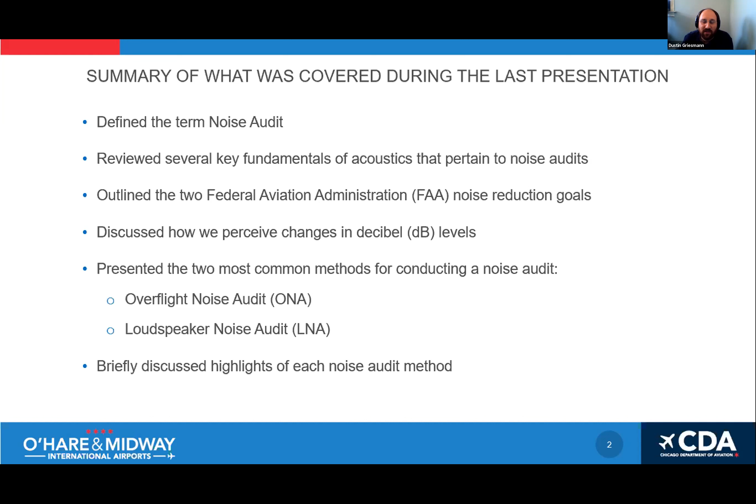So good morning, everyone. Thank you for inviting me back to present some more information on the RSIP noise audit process. Today's presentation is going to focus on noise audit regulation and guidance. But before I begin, I'd like to briefly recap what we discussed last time. So in my previous presentation, I defined the term noise audit, reviewed some of the key fundamentals of acoustics. We outlined the 2 FAA noise reduction goals, discussed how we perceive changes in decibel levels, and then presented some information on the 2 most common noise audit procedures, being the overflight noise audit and the loudspeaker noise audit, and then provided some highlights on each one of those.

Today, I'd like to build on that by providing you with some additional information on the noise audit regulations and guidance. I will begin by listing the applicable regulation and guidance documents, and then I'll show you how these documents have led to the noise audit procedures that we use on RSIP. So I've divided the regulation and guidance documents that we will discuss today into 3 categories. And I'd like to start with the first one, which would be direct FAA regulations. So first we have the Airport Improvement Program Handbook, Order 5100.38D, Change 1. And this is the primary instructional document that governs the AIP-funded residential sound insulation programs. Now, Change 1 was released in February of 2019, and most of the applicable information relating to sound insulation can be found in Appendix R.

Inside there's one reference to noise audits, which lays out the requirement for programs to use the 1992 guidelines when establishing existing interior noise levels. So that brings us to the second item there, the advisory circular. That is the 1992 guidelines. So it's Advisory Circular 150/5000-9A, and that is the active guidance document for noise audits. I would say, however, that the majority of the guidance in there pertains more to overflight noise audits. Underneath there, I put another bullet for a new draft Advisory Circular 9B that was released for public comment in 2019. So this draft AC includes considerably more information related to the noise audit procedures, yet until it's officially released, the 92 guidelines are still referenced in the AIP handbook.

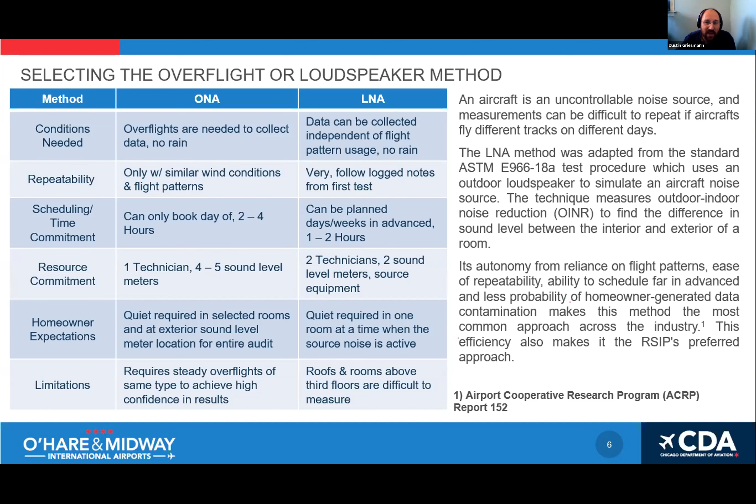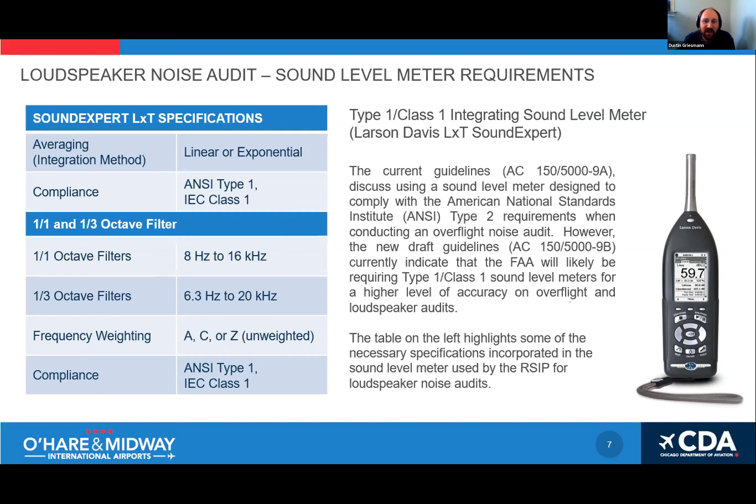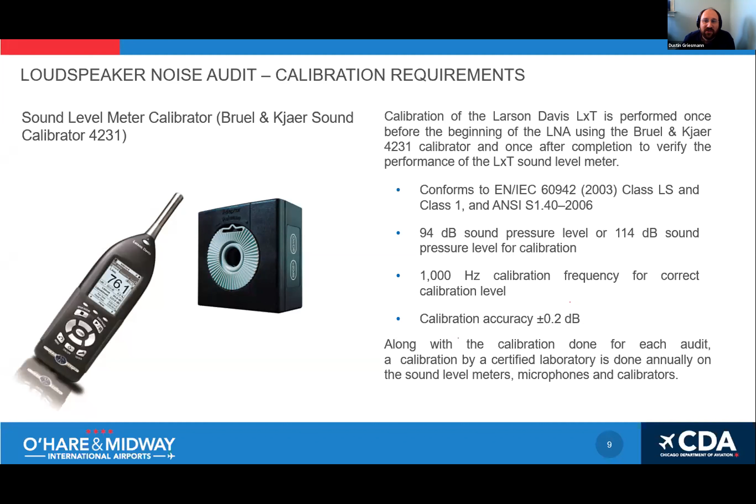So all sound level meters and microphone assemblies are calibrated using a field calibrator just before and after every noise audit. And this provides us with a known level of certainty in our results. But beyond that field calibration, we also send all sound level meters, microphones, and field calibrators for annual calibration through a certified calibration laboratory. And this again ensures that our equipment is performing to all the manufacturer recommended standards.

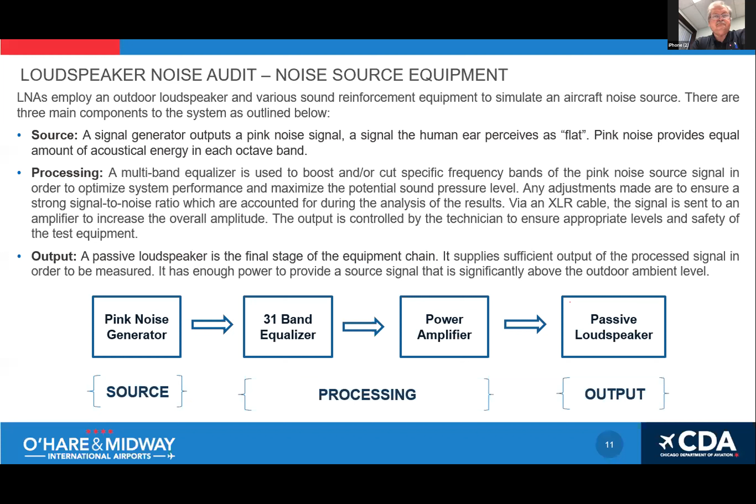Next, we have the processing section, which normally consists of an equalizer and a power amplifier. And this equalizer is used to focus our available amplifier power to the frequency bands of interest and increase the signal to noise ratio of the system. And finally, the amplified signal is then sent through a loudspeaker and then transmitted to the exterior facade being evaluated.

And it should be noted that these desired locations and angle of incidence may not always be possible. Sometimes we have physical obstructions on the property that might hinder that. So this distance and angle of incidence can be adjusted as long as some other requirements are met.

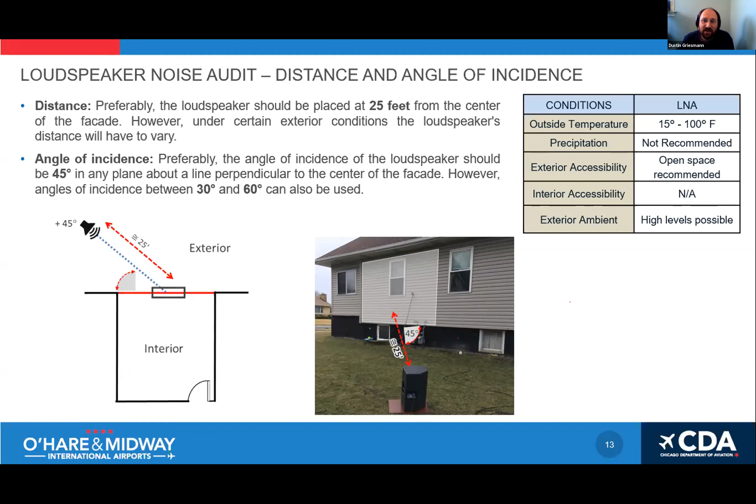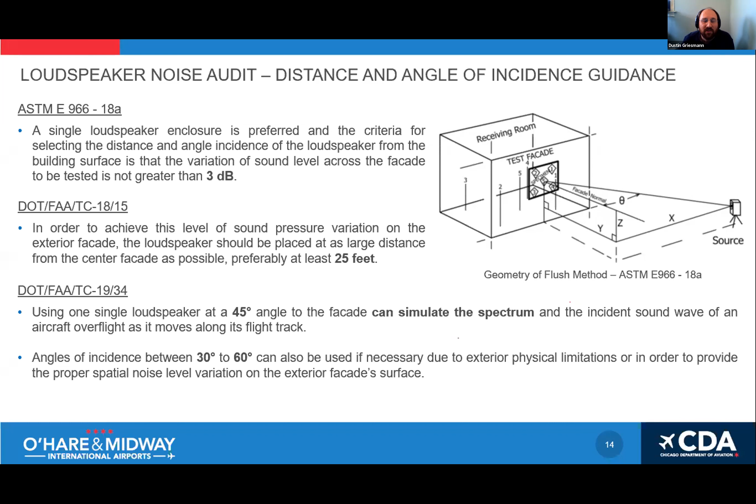Excuse me. So the next factor deals with the mounting method of the loudspeaker. For first floor rooms, as well as second floor rooms that do not reach higher than 24 feet, the loudspeaker is to be mounted on the ground. And when the measurements of a second floor room reach higher than 24 feet, the loudspeaker should be elevated on a speaker stand to a height of 6 feet.

Now this would also be necessary if we were conducting an audit on a multifamily building where that floor under evaluation is higher than 24 feet. Also noted here is the potential need to tilt the face of the loudspeaker back slightly when trying to aim the test signal at a specific facade height.

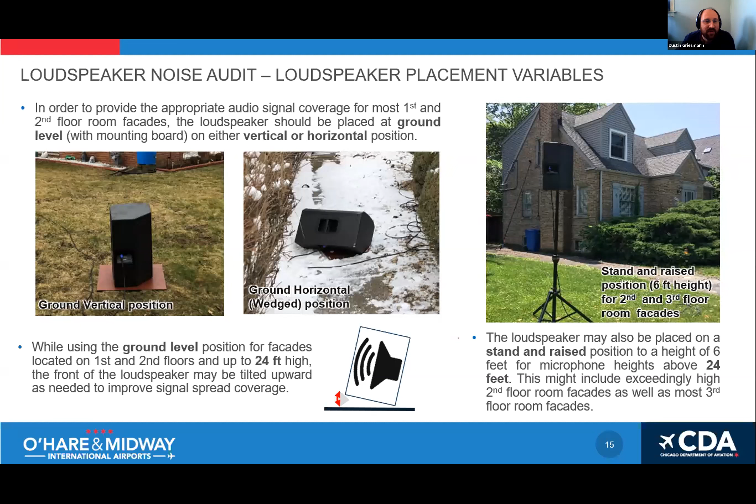So why does the RSP use the ground mounted loudspeaker for some measurements and a 6-foot mounted loudspeaker for others? The answer really lies with the problem known as ground reflection interference and the negative impact that has on the accuracy of our measurements. So when a loudspeaker is elevated and a microphone is elevated to measure at a specific height on a facade, you get both direct sound that travels from the loudspeaker to the microphone, as well as reflected sound that travels from the loudspeaker to the ground and then from the ground to the microphone.

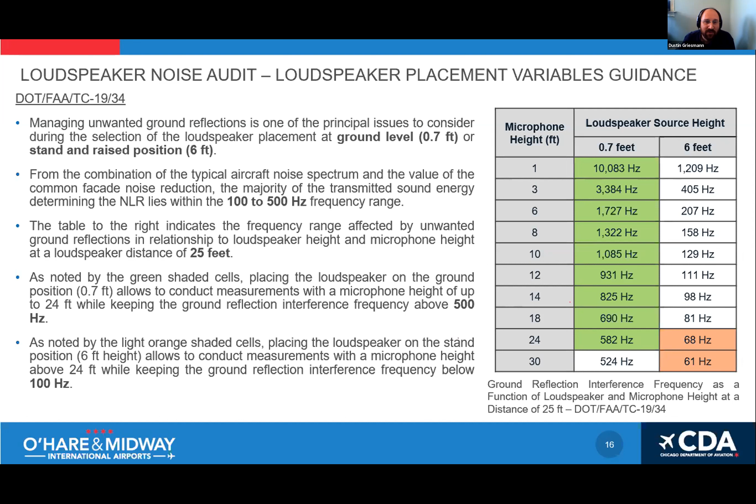Taking this further, the number of facades the room has will also impact the noise audit procedure that we use. We see here that for rooms with only one exterior facade, the 1W procedure can be used. And the loudspeaker can really be aimed from either the plus 45 or the minus 45 degree location.

For rooms with two exterior facades, the RCP would need to use either the 2W1 or the 2W2 procedure, and this is dependent on the presence of any nearby reflecting surfaces that might prevent an equal audio signal spread across both facades with a single loudspeaker. So if we see that there are nearby reflecting surfaces or we can't get that equal audio signal spread, then the 2W2 procedure would be necessary.

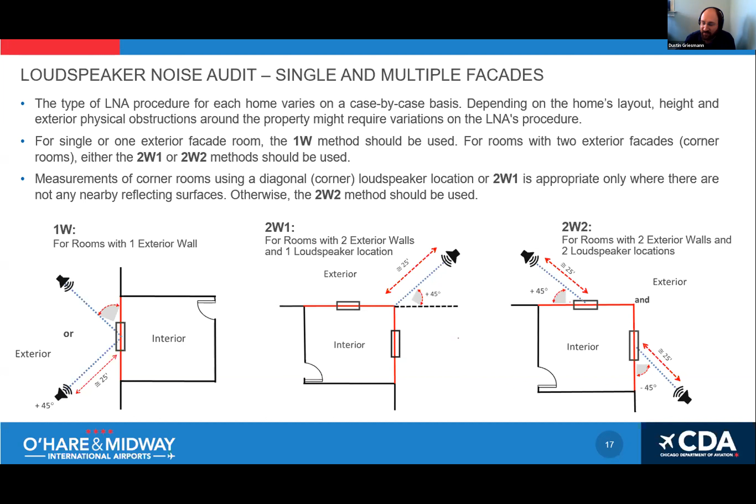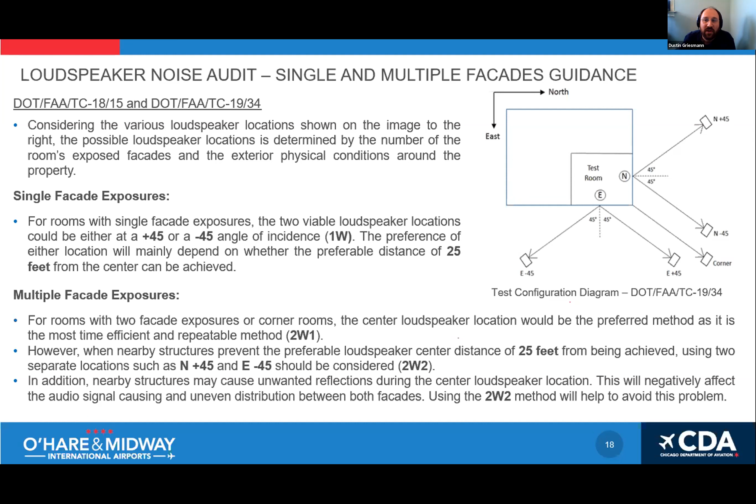Next, we have audio signal spread verification. And we've defined that here for you as the audio signal spread is the reduction of acoustic energy that's measured throughout the extent of the exterior facade as the measurement location moves further away from the focal point of the signal.

So this variation is measured to ensure that the entire facade is being exposed to an even distribution of acoustic energy. And if we did not have the equal coverage, then you would not be testing each element of the facade equally. So as mentioned earlier, the audio signal spread across the facade must not vary by more than 3 decibels. And depending on the number of facades in the room, this procedure involves adjusting the loudspeaker angle and distance to meet that 3 decibel requirement.

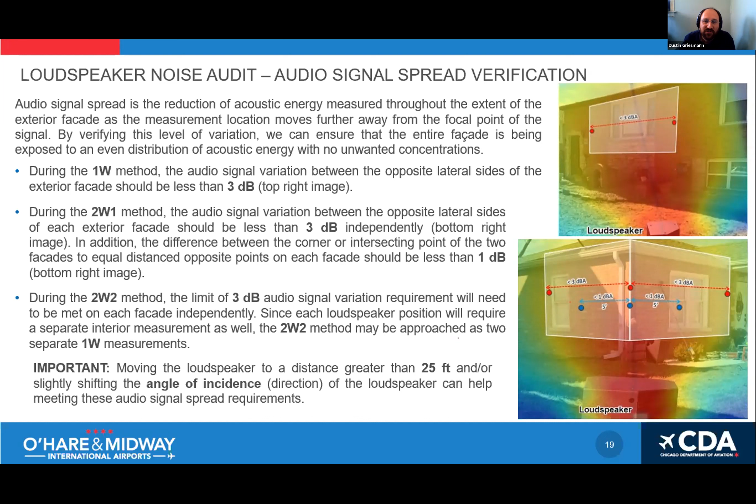For corner rooms with 2 facades, the difference in level from equal distance opposite points 5 feet in on each facade would be measured to ensure that they're within 1 decibel of each other. And if that is the case, then we can use the 2W1 procedure. And if it's not, then we would use the 2W2.

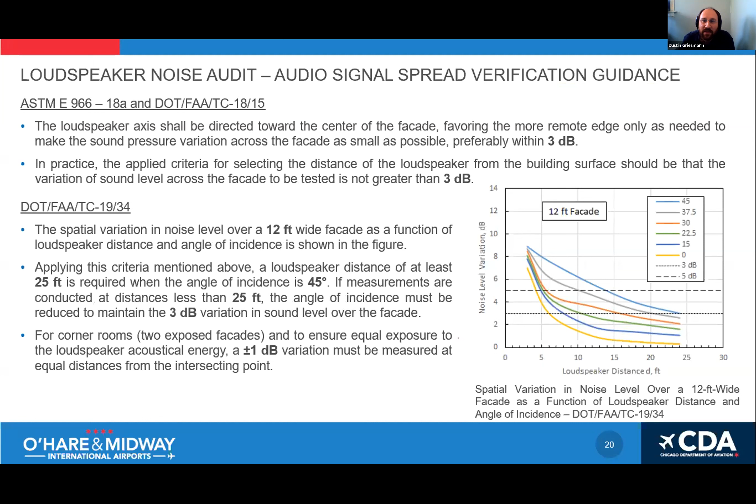So a key point to make with respect to any interior and exterior measurement is the need to take ambient and background level measurements. These are typically 30-second measurements taken both inside and outside when the audio signal is not active, and that documents the resting noise level without any introduced noise.

Next, for the exterior measurements, these are conducted at 5 randomly selected flush mount points against the facade. And the microphone should be a maximum of a ½ inch from the facade surface. And the flush mount point should be no closer than 2 feet from any perpendicular surfaces to the facade.

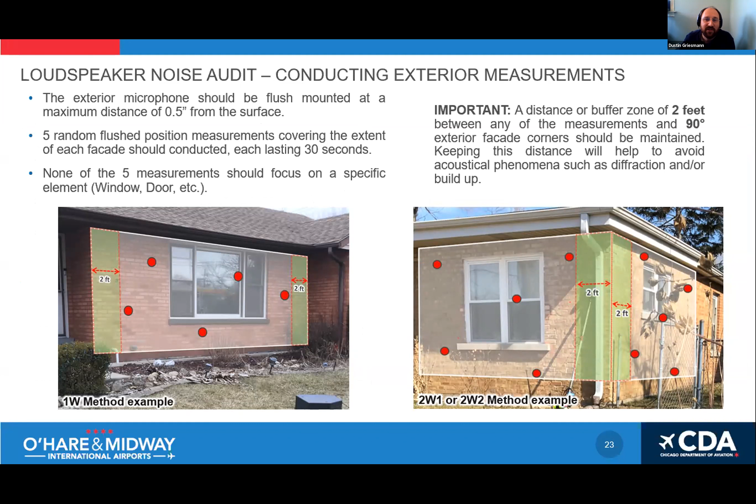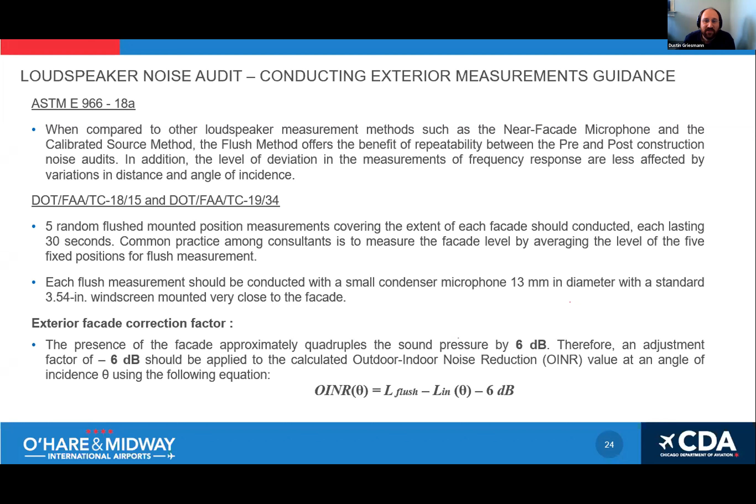Moving on to the interior measurements, we conduct two 30-second spatial average measurements per room. The microphone is mounted at the end of a short extension pole, which is used to keep the microphone at least 2 feet away from our body.

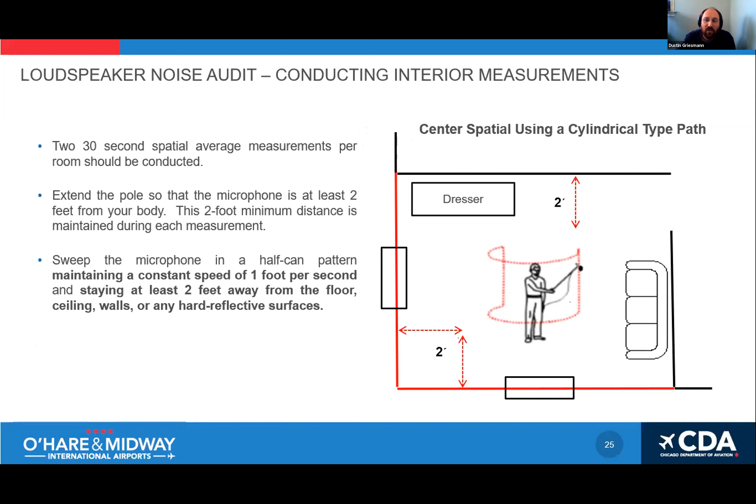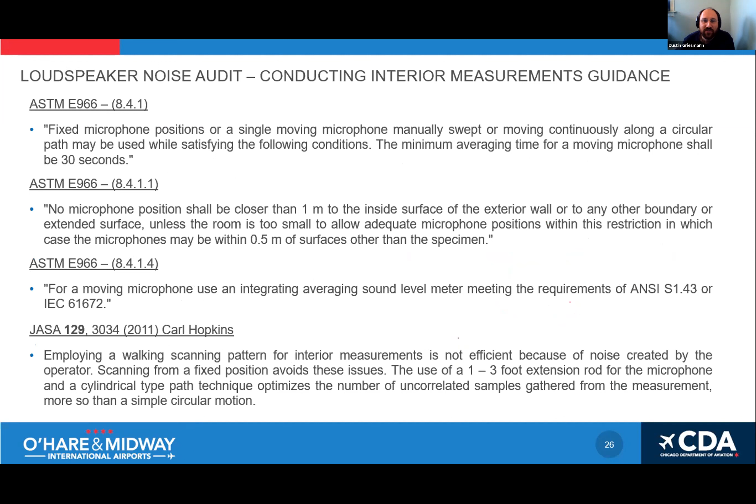The microphone is swept in a half-can cylindrical shape, maintaining a constant speed of 1 foot per second, staying at least 2 feet away from any hard reflective surfaces. As before, the guidance slide here is shown supporting that spatial measurement technique and the duration that I described.

Hey, Dustin, it's Aaron. Can you take a pause and switch from your headset to your speakerphone? Is the audio unclear, or? Yeah, you're cutting in and out for the past 5 to 7 minutes. I'm actually not on a call. I'm using just the computer. I can try and move forward or back if that helps a little. Well, whatever you did just now made it worse. Is that pretty good right there? Yeah, but don't move. Okay, I'll do my best.

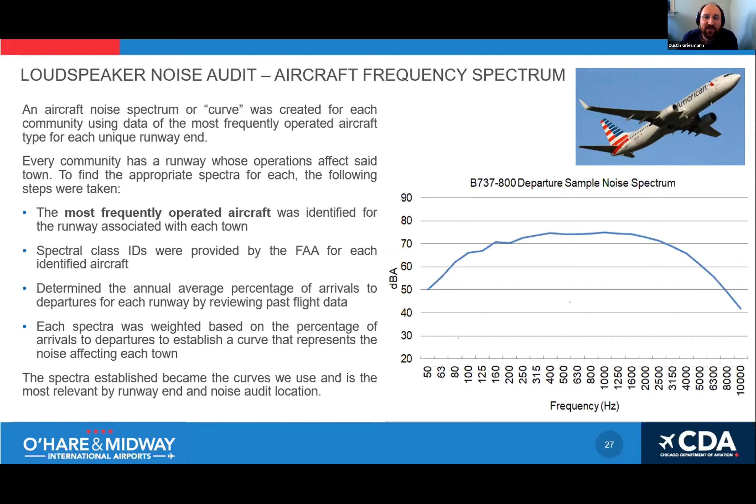So we're very close to the end. So wrapping things up, I'd like to end with the development of the aircraft frequency spectrum that's used in the noise level reduction calculation. The process began by determining the most frequently operated aircraft for each runway end for both arrivals and departures, and then requesting the corresponding spectral class ID and frequency spectrum data for each of the identified aircraft. We then determined the annual averages of arrivals and departures for each runway, and finally weighted each spectrum using those percentages to develop a curve that can be used to represent the noise for each town.

It's very important to know that this was not a procedure that we established, but it's the recommended interim approach provided in the HMMH report number 305.220.008. The report outlines a tiered approach comprised of an interim procedure that can be used immediately and then a long-term approach that's still in development. The procedure that I just described is the recommended interim approach, and that will be in place until a more long-term solution can be released.

And to further support this decision, the draft advisory circular likewise states that the most frequently used aircraft at an airport by runway end should be used. That does conclude the presentation, and I just want to thank everybody for their time.

Thank you, Dustin. We have to revisit back to the approval of the minutes from that review. I need a motion for the approval of the minutes. Someone make a motion, please. There was a motion and a second. We just need a voice vote for all the members. Okay, thank you. There was a motion by Ernie and a second by Brian. All in favor, say aye. Aye. Aye, thank you.

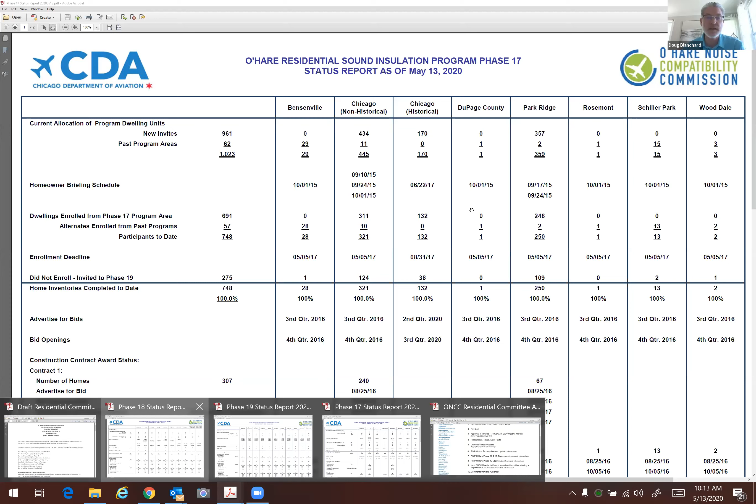Does anybody have any questions for O'Hare Phase 17? Nope. No questions. Okay, so I will share the O'Hare Phase 18 status report. Can everybody see that on their screen right now? Yes. Okay, great. Now I know I can share my screen properly.

All right, so here is O'Hare Phase 17. I'm sorry, O'Hare Phase 18. There's a few things I wanted to point out. The homeowner briefing section, this did not change. That happened quite a while ago, last fall. We do have this row here for number of homes that did not enroll yet for Phase 18. But I wanted to point out that these 127 homes all were invited to O'Hare Phase 19.

And again, there's a breakdown by community here. 24 in Bensenville, 35 Chicago, 13 Des Plaines, 12 in Park Ridge, 4 in Rosemont, 23 in Schiller Park, 8 in Wood Dale, 5 in unincorporated Cook County, and 3 in unincorporated DuPage County. So one thing to note here, the number of homes that actually did enroll was 400. So we started out with 527 homes, but only 400 of those homes did enroll.

The next row down, home inventories completed to date. We have 281 home inventories completed so far, and wanted to notify you that with this stay-at-home order, we stopped performing home inventory appointments on March 17th. So our last appointment was conducted on March 16th. So that's why there's a difference there between number of home inventories complete from the 400 to the 281. So we do have some work to do, and we can get back into homes. So hopefully we can do that in June. We'll see how that goes.

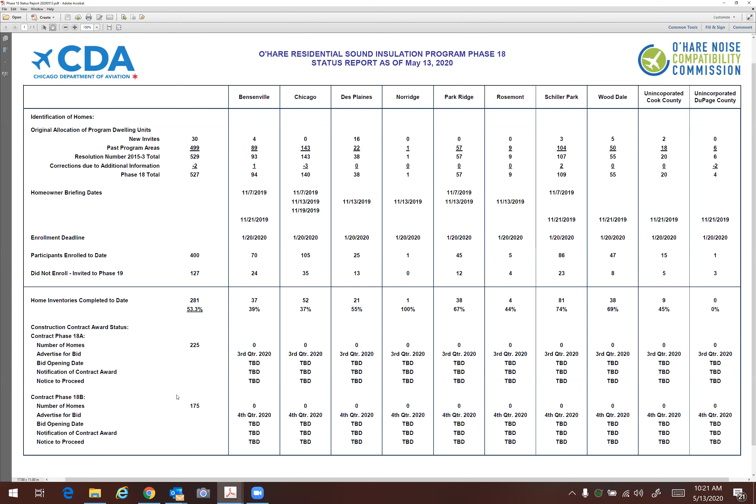I would say yes, Ernie. Phase 18 was largely folks that contacted us either in response to an inquiry postcard a few years ago, or folks that had called in to what we call the RSIP inquiry line. So the majority of this group of homes were people who were looking for us in order to enroll, and as a result of that, we do have good participation, and we're very positive about that. Great, thank you.

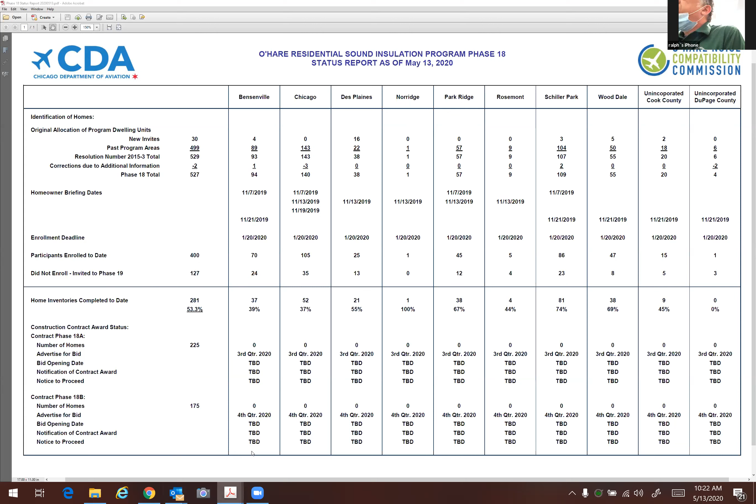Okay, if there's no more questions for phases 17 and 18, we'll now move on to phase 19 status. Will that be Doug or Aaron? I can go over that. Yeah, Doug, go ahead. Thanks, Doug. So I just put on the screen the status report for O'Hare phase 19. This is the first time we generated a report for this phase. So we do have a lot of good news here. So there might be a lot of new information for you to take a look at.

So right now we have this broken down at the top, allocation of homes. We have a total of 1,131 homes. And you'll see we broke it down on homes that were invited in past program areas versus homes that were invited in for the very first time. So Bensenville has 103 homes, Chicago non-historical 406 homes, Chicago historical, these are those 38 homes that we saw in phase 17.

Des Plaines has 46 homes, Norridge 1 home, Park Ridge 222 homes, Rosemont 31 homes, Schiller Park 125, Wood Dale 103 homes, unincorporated Cook County 34 homes, and unincorporated DuPage County 22 homes. So this makes up the rest of the homes that are available in this current noise contour. So everybody has a chance to participate if they elect to do so.

The next section down here is a virtual homeowner briefing. I wanted to share with you a little bit of information. Normally we conduct homeowner briefings in a banquet hall setting and invite 200 homes or so. At this time with the stay-at-home order, we are not allowed to do that, to gather people in one setting. So we put together a virtual homeowner briefing and we taped 3 separate briefings, one for single-family homes, one for historical homes, and one for multifamily homes.

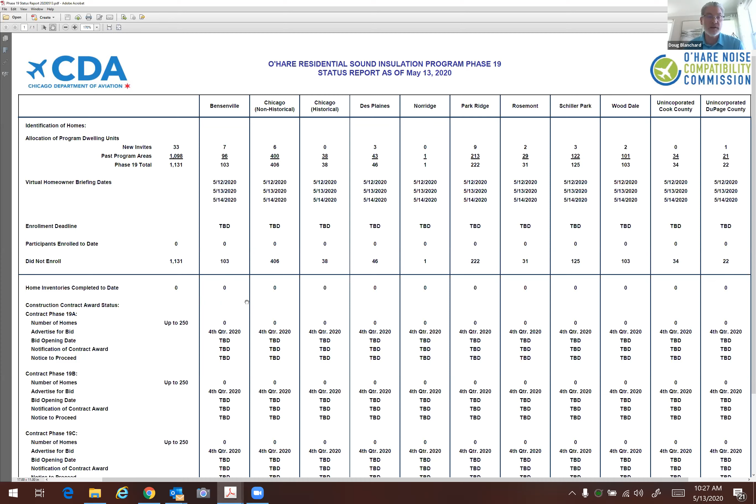I wanted to point out the first opportunity that we plan to go out to bid is the 4th quarter of this year for phase 19A. And then, hopefully a month behind that, we can go out to bid in 19B, and a month after that, we hope to go out to bid in 19C. The 19D, we have on here 381 homes. That's the remaining homes to make up the 1,131.

We are not quite sure if we'll get all 1,131 homes, but if we do, it takes some time to get those home inventory appointments completed, and we will go out to bid in the first quarter of 2021 if we get all 1,131 homes signed up. I think that's it for this report. Chairman, do you have any questions? I don't have any questions, but do any members of the board have any?

Ralph, Frank here. Yeah, Frank. A question for Doug. Did you say you mailed out all the invitations to all the people in the noise contour who are qualified to apply for this? Yes, for all those 1,131 homes, we mailed the letters on April 29th. Okay, thank you.

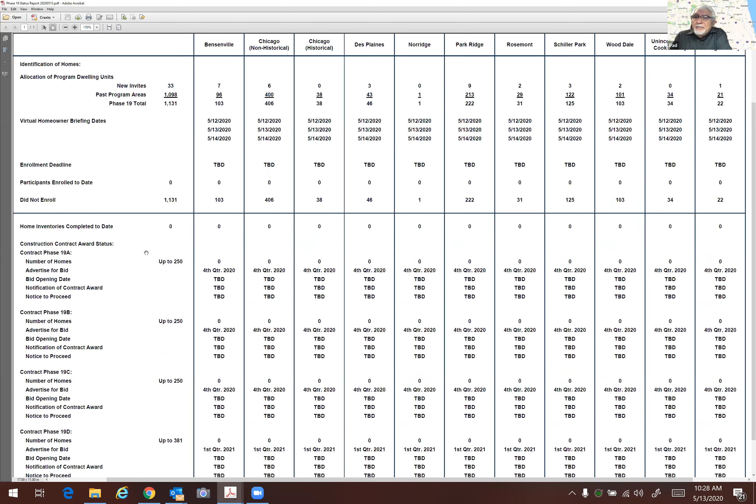Chairman, it's Aaron. Just two final points on this report. Number one, I need you to encourage your colleagues to participate in the next full meeting of the ONCC. I still need the phase 19 resolution passed. We took it to the full commission in February, but Jeanette, correct me if I'm wrong, we did not have quorum and were not able to adopt the resolution. Is that correct? That is correct.

Yeah, so Chairman, it's now May, and we're already doing homeowner briefings. So if all of you are able to participate in the June ONCC meeting of the full commission, that's fantastic. It's really important that we have quorum, whether that's in person or virtual, because your next meeting is not until September, and that's going to be a problem for phase 19. So please, if you can, participate in that ONCC meeting to get this resolution adopted.

The last thing is, please remember everyone, this is the last phase of OMP sound insulation. If the homeowners do not enroll this summer, they may likely never be eligible for sound insulation again. I do believe at some point in the future, the CDA will generate a new noise contour, but it remains to be seen when that happens and when it's approved by the FAA. So please do encourage all of your homeowners to enroll because we do not know what the future noise contour will look like.